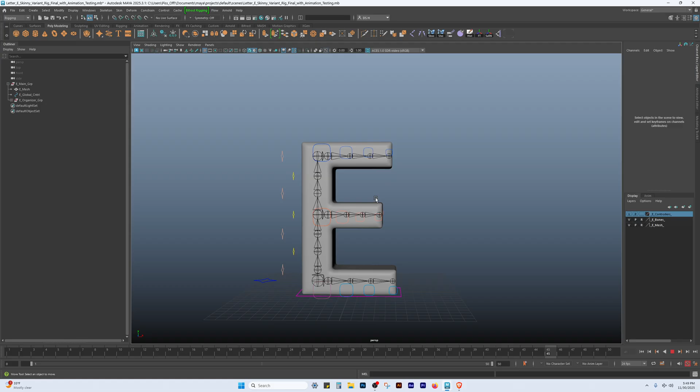I'm gonna show the controllers and the bones. So I think it's pretty decent. I'm gonna press P so that when it plays the play blast, we won't see the bones or the controllers. This is not bad.

Let me make the transparency gone. And this is the final rig, meaning everything's in here. It's also obviously, you can tell that the scale has been animated. Super cool.

So this is all purely forward kinematics based. Yep, so that's what it's gonna be. So even though this is a relatively very simple rig, for what it's worth, it's pretty darn robust. Anyway, I'm gonna be starting on that. One moment.

Alright, so from here, make sure that we have our menu set to rigging. Okay, and then from there, let me just make room. Alright, so I'm gonna wipe out all my tools that I put on my shelf, so that students who are just watching for the first time can see what tools I'm putting on the shelf.

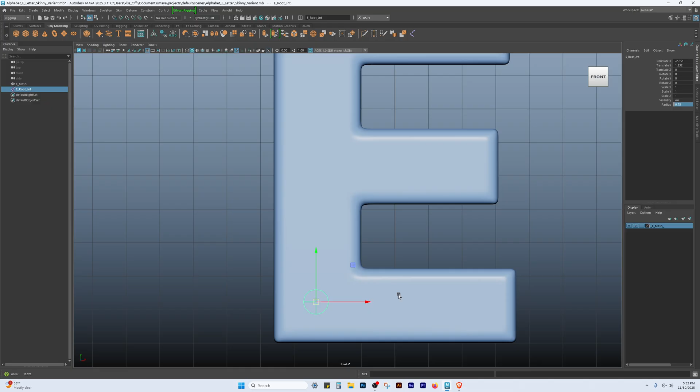It says joint 1. I'm gonna just press W, but we don't see it, you need to press over here. There, see? And then I'm gonna name it immediately E root JNT, there, E root JNT for your root joint. Root joint means where all other subsequent chains will branch off of the root joint. So I'm gonna place it right around here.

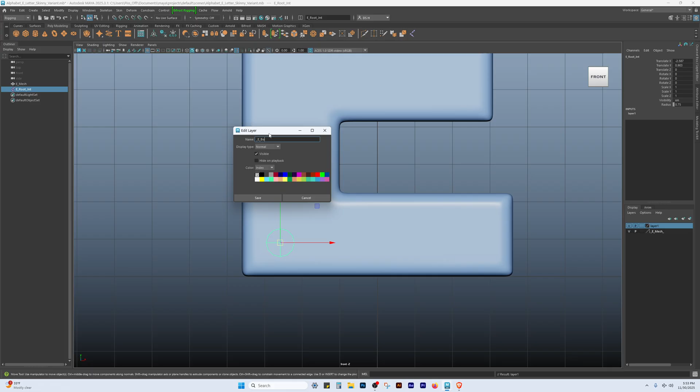Okay, and then from there, what I'm gonna do is, you know what, let me put this in a display layer. Click here with the bone selected, double click here. Underscore E bones underscore save, like that.

Alright, I'm gonna make a copy of this, Control D as in David. I'm gonna scoot it over, and immediately I'm gonna name it, let me see here, arm1 underscore JNT and underscore 01. Actually, you know what, I think I want to make the spine first,

or should I just start off with this? Fine, I'll just start with this. Not that it really matters, but whatever. 0.5, I scaled it down, meaning the radius, to 0.5. It's just purely to help me kind of see and differentiate what is what.

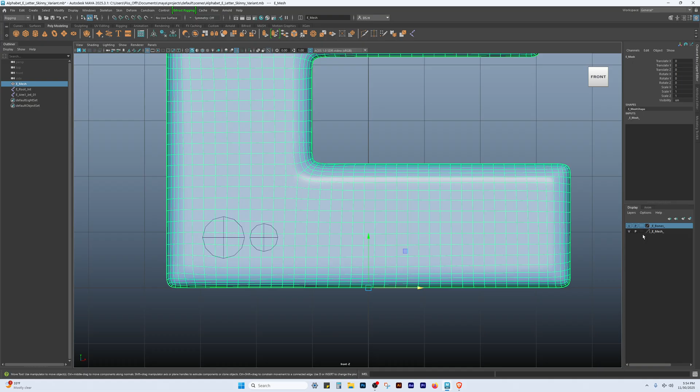I'm going to put my mesh as a reference so I don't grab it. And then from there, so I have this. Alright, and you notice that if I turn the bones display off, both of the bones are already in here. So that's a nice little thing. And let me just double check something.

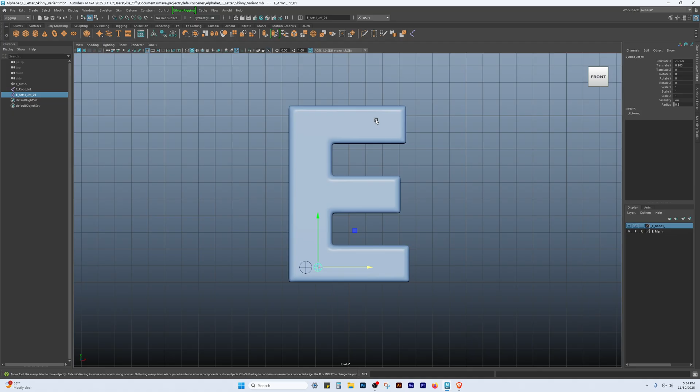Alright, so this is going to be just classified as an arm, this body part. So I named it arm1 joint 1. I'm going to make a copy of it, Control D as in David. As you can see, the naming convention follows along very nicely, at the end it says 02. I'm going to scoot it over right around here.

One thing I do notice is that the distance from here to here, I want the bones to be more in the middle, like around here. Maybe even a little bit more. Yeah, something like that. So that's good. And then I want this much distance.

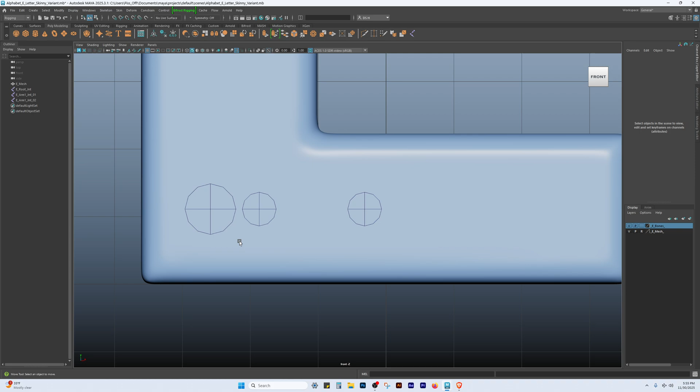This guy, I put it really close to the root joint for a reason. And the reason why is because of this, where, so let me just show this.

So you'll notice this, right? This is my controller, but the controller is manipulating the bone. But see, this is why I put the joint so close to the root joint, because the actual pivot point happens, how do you see this? Right. So the pivot point, it does not, if you don't have a joint here, and if you place the joint here instead, it's not gonna pivot off of here.

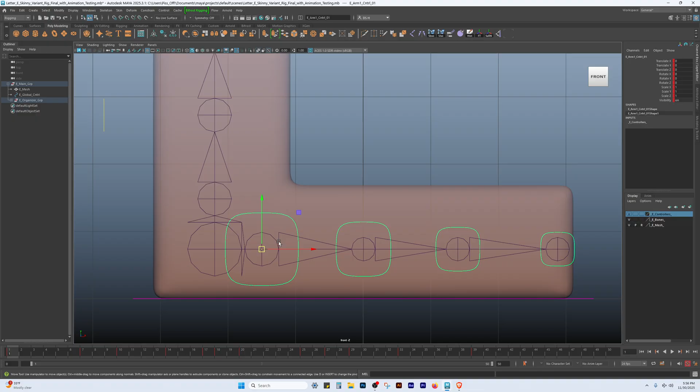So you need to put one over here in order to make it pivot from the stem or the base. Yeah, so that's the reason why. You'll notice that in all of my tutorials I emphasize that a lot.

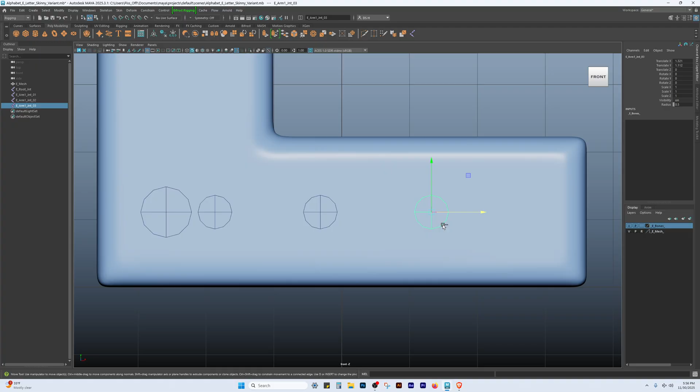Anyway, from here, Control D as in David, about this much spacing, maybe a little bit like that, and one more, Control D as in David. I'm going to put it right around here.

I used to put it outside around here, but I think what happens is that it starts to lose how many influence that the bone has onto the vertices. So I've just made it safe and put it inside. So this is the distance that I set up, something like that. So far so good.

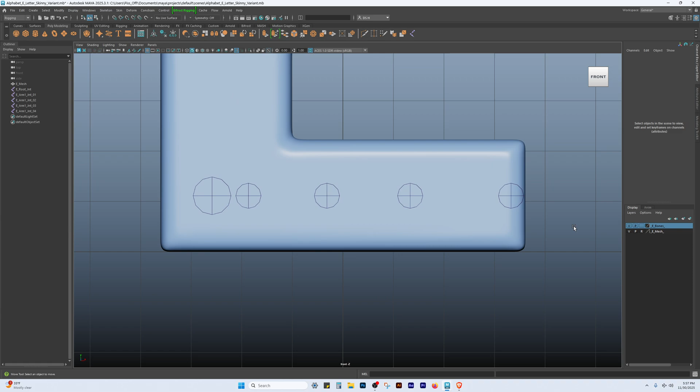And then what I want to do is start on the spine. I'm going to grab the root joint, JNT. I'm going to make a copy of it, Control D as in David. And I'm going to lift it up. And immediately I'm going to name it as spine JNT 01, like that.

I'm going to make it smaller, I don't know, 0.5. This one was 0.5 as well too. And yeah, so this is spine 01.

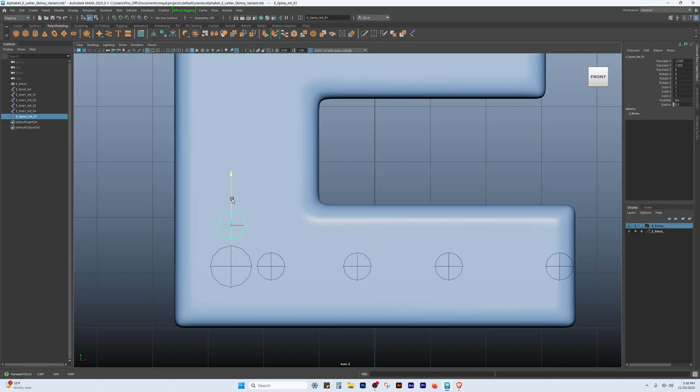Same thing, I want the spine to be close to the root joint, because I want to be able to swivel off of here. Yeah, because if not, if you place your spine joint up here, it's gonna swivel from here and not from here.

I already mentioned it, but I have to mention it again because it leads up to better rigging for characters as well later down the line, even though this is an alphabet.

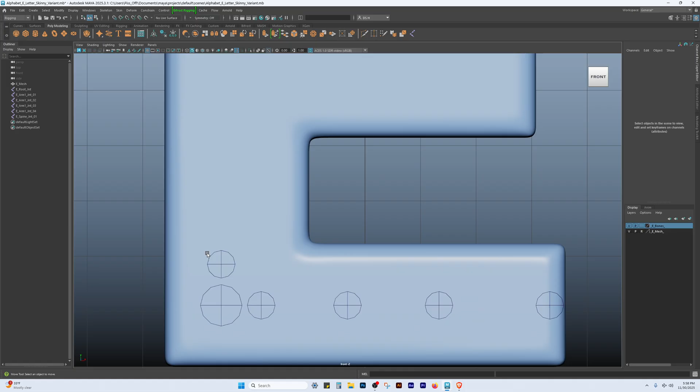Anyway, so I did that. And then from there, I'm going to do Control D as in David. And as you can see, the naming convention follows along very nicely. Right. And then after that, I'm periodically looking at my example file, so just bear with me.

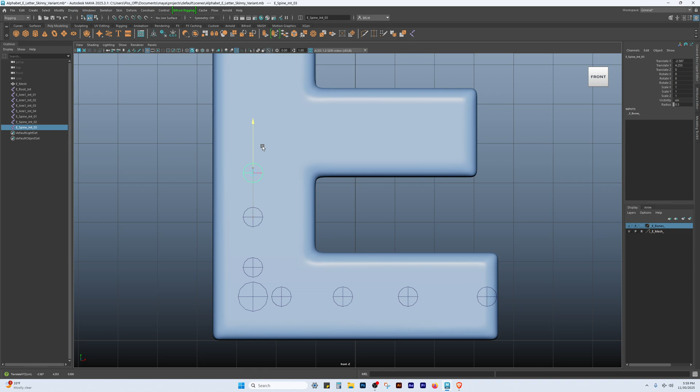Make another copy, and I'm gonna place these two somewhere around here. And I think I want to make it like 0.35. And you know what, these down here too, radius of 0.35.

It's just so you can see that these are swivel joints. Just realigning. Something like that. That's good.

Alright, and then so that and that, maybe a little bit like that. Yeah, now I'm gonna grab this, Control D as in David, scoot it up. I'm gonna put this radius of 0.5. I don't know, maybe, 0.5, 0.6. I just made a radius of 0.6.

Again, it's just purely for visual sake, you know, so I can just see visually. Yeah. And then from there,

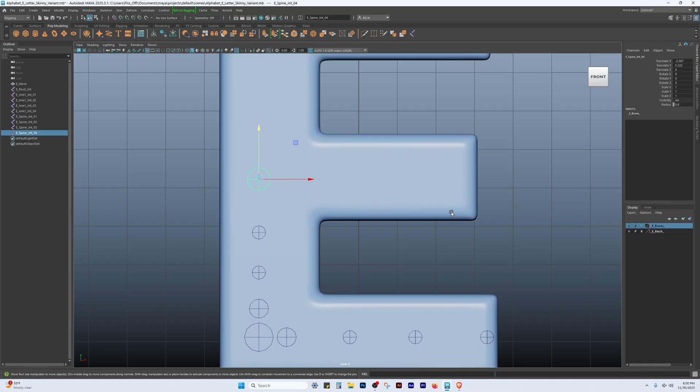What I'm gonna do is I'm gonna grab these guys from the inside out. I think I'm gonna make a copy of it. Control D as in David. Bam. I'm gonna scoot it up like so. And then I'm gonna grab this, chuck it over here.

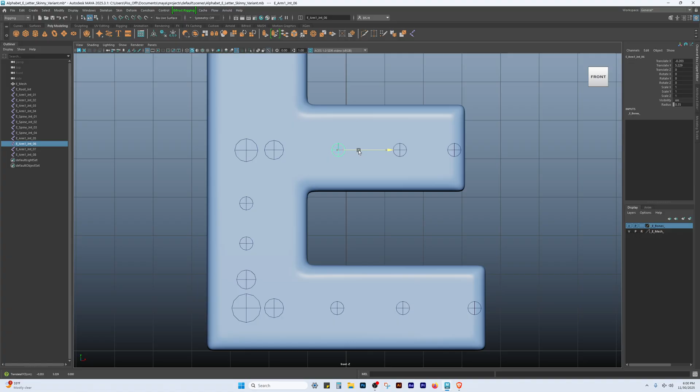Maybe do that a bit. Something like that, yeah. I'm just guesstimating, and I think I need to also rename it.

I'm gonna grab from the inside out, holding shift. I'm going to rename these, and the way I'm gonna do that is, I could use this over here. This is also used in rigging, but instead I'm just gonna go up to modify, search and replace names. I'm gonna put it on the shelf, Control Shift left click, bam. That's search and replace name, SARN, under modify, search and replace. Boom.

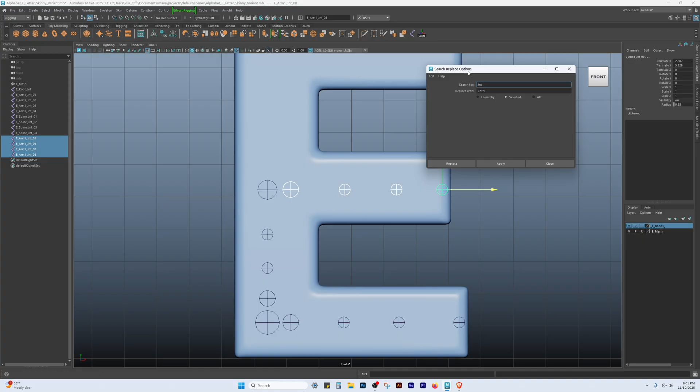So I'm gonna look for arm 1, replace it with arm 2. I can't replace the joint names, only the arm 1. Replace it with arm 2, hit apply. And there you have it.

Then I have to go in manually, double check that this is for that. I'll put 1. This matches with this, just to confirm it's actually the second joint. This matches with that, that confirms it to be the third joint. And this obviously matches to the fourth joint there. So arm 2, joint 1, arm 2, joint 2, arm 2, joint 3, arm 2, joint 4. And there you have it.

Then I'm going to grab my spine joint 04, making a copy of it, Control D as in David. Hey, I saved it by accident, Control S instead of Control D.

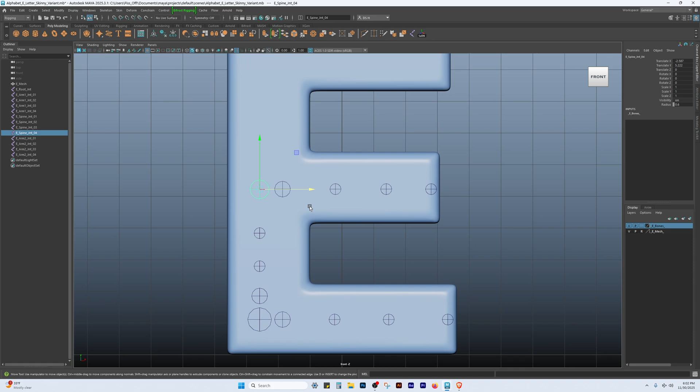So that's spine joint 5. And I'm not going to place it close by, I'm just going to place it probably right here. I'm going to reduce the size to like 0.35. Whatever you do, not scale the joints, just don't do that. So that's spine joint 5.

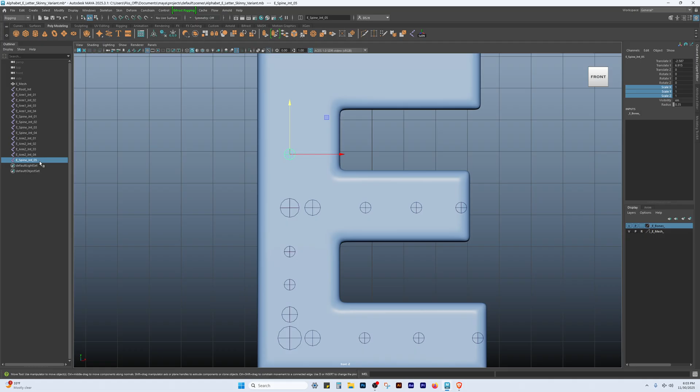Control D as in David, make a copy, scoot it up somewhere around there, something like that, something like that. Control D, make a copy of that joint, scoot it up around here, scale it to 0.65. Alright, so that's 0.65.

This one, I'm gonna make it 0.65, and this one, 0.65. And 0.6.

Alright, so after that I'm gonna grab these arms, the ball joints, and shift select from the inside out. I keep on saying selecting from the inside out because it maintains the selection order, because if I do it like something like this, it jacks up all the selection order and it's super annoying as hell. So you select from the inside out, out, out, Control D, and as you can see, it's all in order, and scoot it up like so.

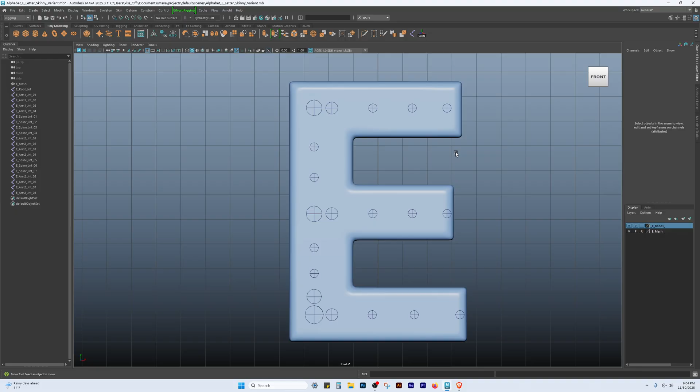Let's check it out. Yeah, all in order. Grab it here again and use the search and replace name. I'm gonna replace arm 2, replace it with arm 3. This is the third arm, that's why. Third arm set, apply. As you can see, it's all renamed, but I have to go in manually.

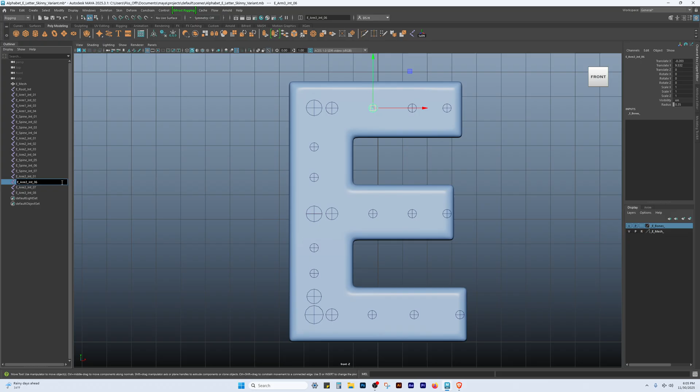Leave it as joint 1, joint 2, joint 3, joint 4. Boom, all done. So that's setting up all the bones, and they're all on the layer.

Very nice. And I'm gonna grab this and just kind of scoot it forward a bit, just checking out the spacing, more or less. Yeah.

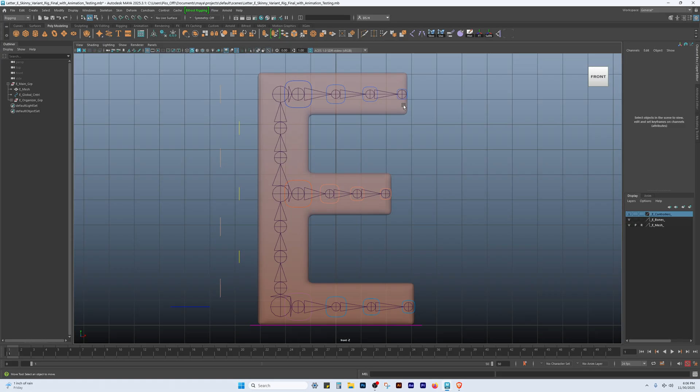Because wherever you place the bones, right, is where it's gonna obviously, you know, bend from. I do have to mention that, because it's the idea of bones and everything, it's very abstract, you know. See?

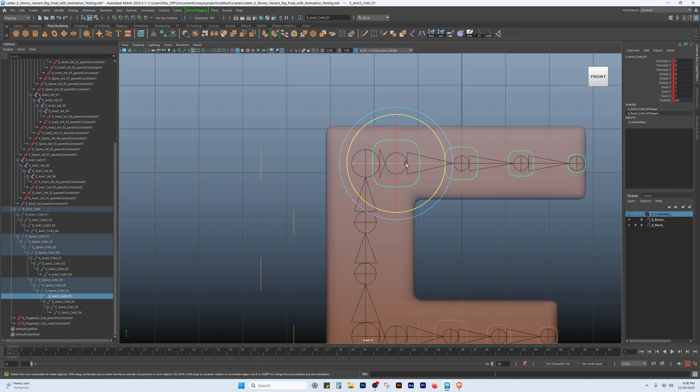And as you can see, the controller, it's the controller, right, down here, its location is exactly where the bone is. Hence, you know, the range of motion begins here.

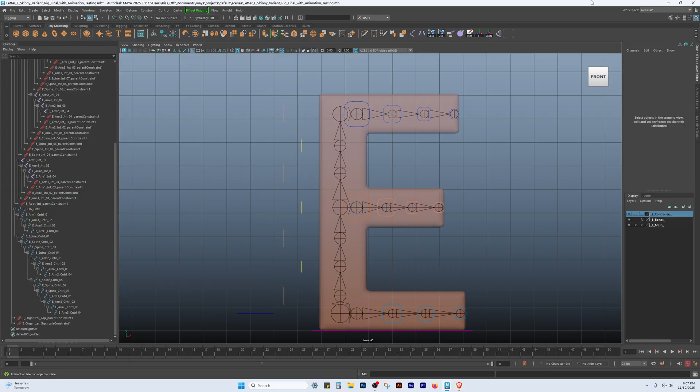You know, another side note, to pose your character, you grab from the outside in. See? And then you can grab from here, outside in. So again, I'm mentioning this many times over because when I was learning many years ago, it was hard to understand and conceptualize the idea of how much and where each joint will be influencing the meat of the character,

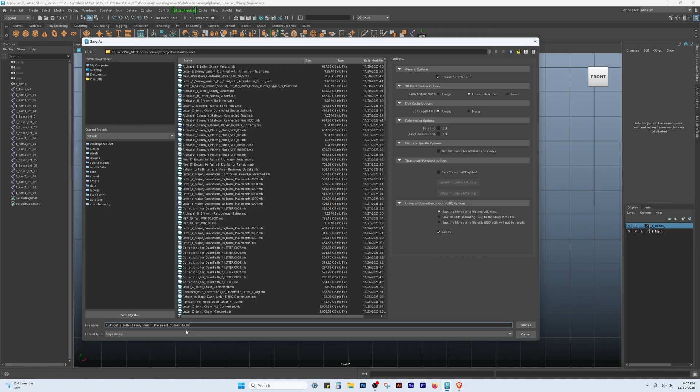meaning its flesh. Anyway, I named this as, let me see, skinny variant, placement underscore of joint nubs. So I just named it as that. Yeah, joint nubs placement. So I'm gonna end it like that for this one.